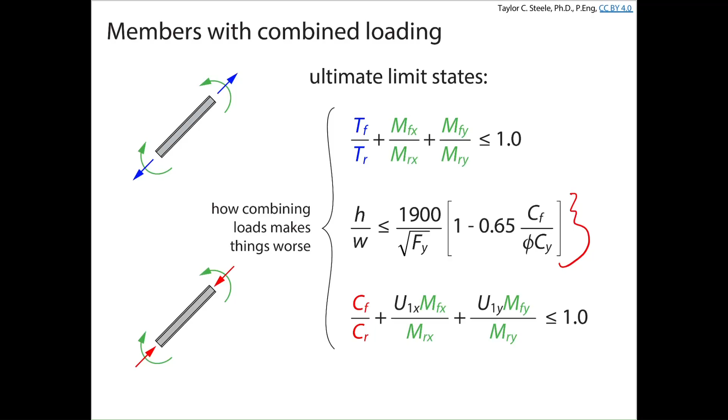Today we're focusing on beam column section class. We already know how to classify beams: Class 1, 2, 3, or 4. That changes a little bit when we've got a compression force, but doesn't change at all when we have a tension force. So for combined tension and bending, you classify the member the same way you would if there was no tension force at all. Beam columns, that's not the case, so we're going to look at how we classify those sections. Once we figure that out, we'll determine whether we check the linear strength interaction we talked about the other day, or the plastic strength interaction, which we're going to talk about today.

A reminder of what we talked about in tension and bending regarding plastic strength interaction: for class 1 and 2 sections, when we can develop the plastic stress distribution, we looked at the interaction between the maximum permissible tension and moment on that section. For strong axis bending, there was a nonlinear interaction that we linearized with the red line and the black line. For weak axis bending, there's a very nonlinear interaction that we linearized with the blue line and the black line.

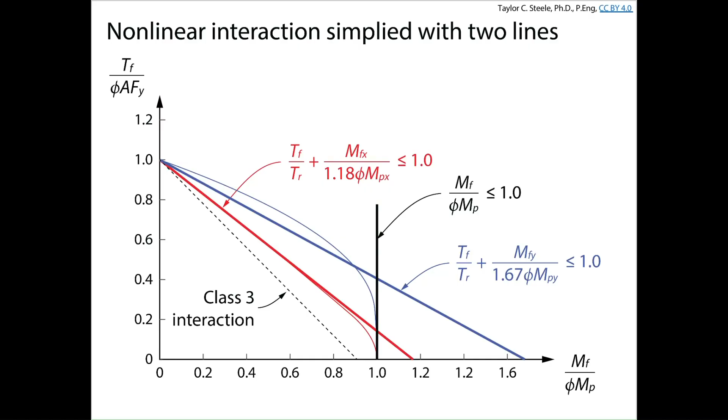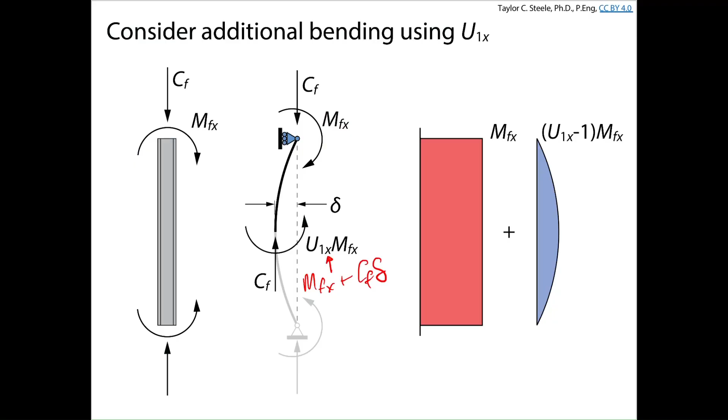The beam column, or plastic strength interaction diagrams, are basically a piecewise linear function where we've got the combined compression and bending as well as the bending-only limit state that we need to check. We also introduced the U1 term and what it's intending to account for in terms of the amplification of bending moment on our beam column, due to displacements caused by the applied bending moment plus an additional moment at midspan equal to the applied bending moment plus the CF delta term—we call that entire midspan moment U1x MFX. Today we're going to look at how to put all these things together in the context of beam columns. After today, you should be able to determine the section class for members with combined compression and bending, or beam columns.

Apply the plastic strength interaction equations to check the strength of a member with combined compression and bending, and describe how to design, roughly speaking, members with combined compression and bending. Spoiler alert: there's no table that really helps us design beam columns.

What you have to do when designing beam columns is just pick something and keep changing it until it works. There's so many things going on here - it's a compression member, it's a bending member, and the section class changes depending on the load. So really you need a program like STAAD.Pro or an Excel spreadsheet to figure out what section is going to be best in this case.

Does anyone have any questions about these three final learning objectives before we get into the content for the morning?

Okay, so we need to unpack section class for beam columns. You've already seen the expression, but I want to talk about what it implies in terms of how the section class changes with the applied loads, and what it's intending to do in terms of treating it as either a pure beam or a pure column, or something in between when we've got combined loading.

When we looked at columns in pure compression, we wanted to make sure we weren't going to get local buckling of the web or local buckling of the flange before we reached the yield stress. If we achieved that, we didn't have to reduce the area, and we could use phi Fy divided by all the junk in the denominator to calculate the compressive resistance. In order for us to not have to reduce the area, the width to thickness ratio, where B was half the flange width, divided by T, the flange thickness, had to be less than or equal to 200 divided by the square root of Fy.

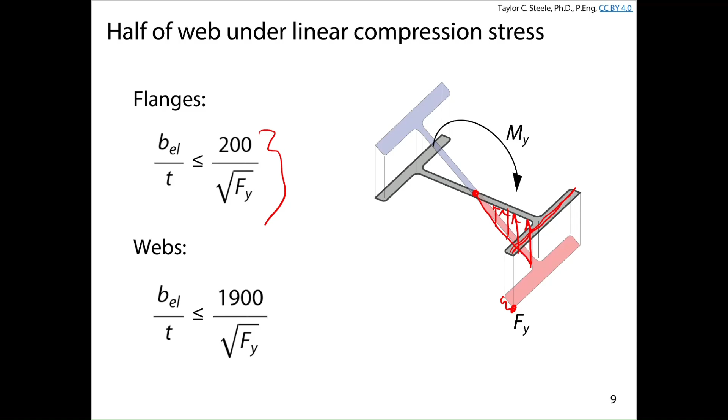Okay, so that's stuff we've already talked about. When we're dealing with beam columns and adding a compression force, as long as we're in the linear elastic range, we can assume we can add these stresses together - the resultant stress from compression and bending. As we add compression, the neutral axis shifts from the center of the section down towards the flange that's in tension. So as we add compression, more of the web experiences more compression, and we're reducing the limit based on the applied compression force.

Basically, if CF is 0, this whole expression just turns into 0, and we get 1, leaving us with the expression we had for pure beams before. But as CF approaches the yield resistance, phi Cy, which is basically equal to phi A Fy, that means we apply less and less bending moment before we reach the strength, approaching the case of pure compression. As we approach pure compression acting on the section, this becomes 1 instead, and this whole term becomes 0.35. 1900 times 0.35 equals 665, which is very close to 670.

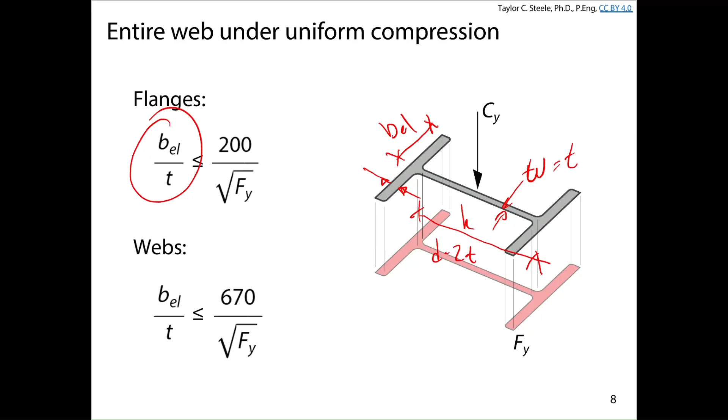Okay, so what we're doing when we're trying to determine the section class for beam columns is we're somewhere between pure compression and pure bending, and the intent of the expression here to determine whether or not, for example, we have a class 3 beam column is basically linear interpolation between pure column and pure bending. Okay, so that's what we're trying to accomplish here.

What that means is section class can change with load, which is kind of annoying, right? You might have one combination of CF and MF where you have a class 2 beam column. For a different load combination, you might have CF and MF where you have a class 3 beam column. And so you have to check the interaction equation differently depending on the section class that you get from those calculations.

Are there any questions about that concept of interpolation between pure bending and pure compression, or why we may result in having a different section class with the different compression forces that we could apply? Are there any questions about those concepts before we continue?

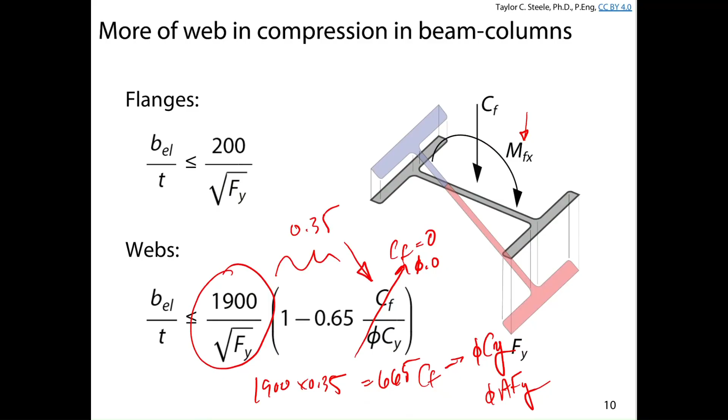Okay, so that's for class 3 sections. We've got a bunch of other things to check. So the flange does not change. We use the same width to thickness ratio limits that we did for pure flexure: 200 for class 3, 170 for class 2, 145 for class 1.

But now, when we're dealing with elements supported along two edges, like webs of I-sections, that are subjected to combined axial compression and bending, then we're dealing with 1100 times some stuff, 1 minus some stuff times CF over phi CY, 1700 with a 0.61, and 1900 with a 0.65.

And basically, the same trend happens as we try to improve the section class from 3 to 2 to 1. The limit on the width to thickness ratio is going to get smaller and smaller, meaning we need to have thicker and thicker components. In this class, we're focusing on strong axis bending and compression.

You could have weak axis bending and compression as well, in which case there's a separate set of things that you need to check. We're not going to get into weak axis bending and compression in this class, but you'll notice that for class 3 sections, it's very similar. For class 2 sections, it's completely different. And for class 1 sections, it's completely different.

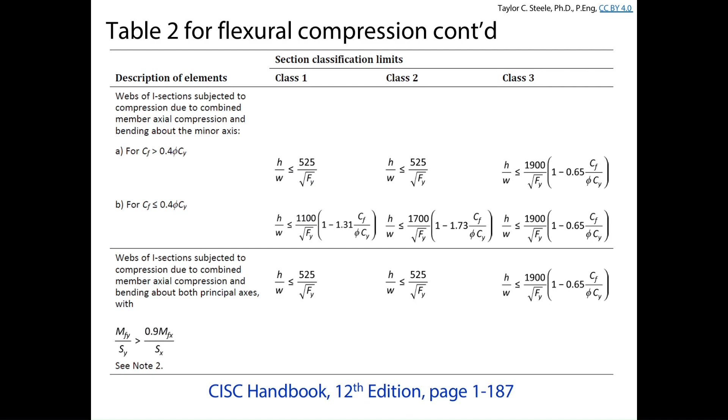Okay, so it depends on what CF is in terms of the yield compression force that you can develop in the column, and that's as much detail as we're going to get into on that.

So I'm going to focus on this for a minute because this is what we're going to be focusing on in this class. So beam columns, why is that doing that? That's annoying. There we go. I'm just going to delete that to stop it. Okay, I'm not going to delete that anymore.

So we're dealing with these 3 potential limits for class 1, 2, and 3. And if we already know what steel we're working with, we've got square root of Fy down here. And if we know what section we're trying to classify, we also know what Cy could be. Cy is just the yield compression force.

I don't know why they write it this way. They should just write it as AFY. Cy here is AFY. And so if we know what section we're dealing with, we know what the area is.

So the only thing that changes or has the potential to change for a given cross-section basically is the factored compression force. So H over W is constant for a section. Everything else is constant except for CF.

There's a very neat table in the handbook, table 4.7, that helps us. It's the only table that's helpful for beam columns in the handbook. It tells us how we can quickly classify different webs of different sections based on the CF to CY ratio.

Okay, so a bigger CF to CY ratio means that the limit gets smaller. Basically, if we have a CF to phi CY ratio for, let's say, W690 by 192, the higher the compression force is, the higher the CF to CY ratio, and the worse the section class is going to be.

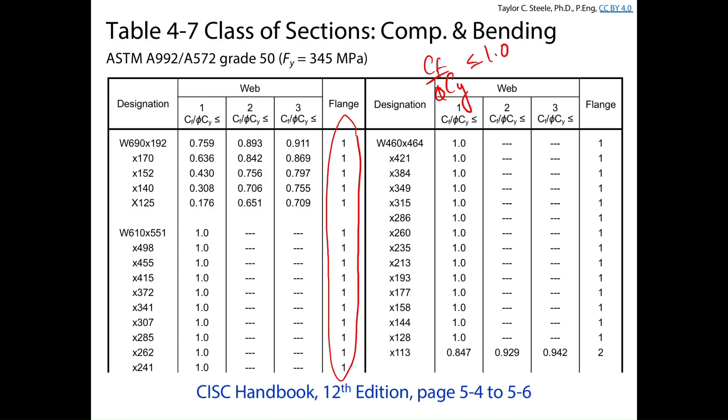Okay. So let's say we got a class 3 section. Well, you go and do the stuff that we talked about on Wednesday. If you get a class 1 or 2 section, you go ahead and do the stuff that we're going to talk about now. And so clause 13.8.2 of CSA S16 tells us how to check the strength of class 1 and 2 sections, specifically of I-shaped members. Okay, in this class we're just going to be dealing with wide flange sections as beam columns. It's a little bit different for HSS, and I think those, well, it has to be doubly symmetric to be considered class 1 and sometimes class 2 anyway. So we're going to focus on wide flange shapes, and therefore we're going to look at 13.8.2 for that reason.

When we think about the nonlinear interaction, well, it doesn't change. All of a sudden, we're just flipping tension to compression. And so in terms of cross-sectional stresses, we're just doing the same thing. We're trying to prevent the yielding of the cross-section, and we're trying to check overall member strength. So in terms of the nonlinear interaction effects that we talked about for combined tension and bending, it's the same for combined compression and bending. Okay, the only difference is now we sort of have this amplification factor from the P-delta effects that we didn't have there from the applied tension and bending.

Basically what this means is that when we start to check the cross-sectional strength interaction, we have basically the same thing that we had before for tension, except now we've got the U1x and U1y parameters in there. So the only thing that really changes is for combined tension and bending, this was always 1.0, at least for cross-sectional strength checks, but it's going to change as we go through different limit states. So for cross-sectional strength, just like tension, it's going to be 1.0, and that's an easy calculation. For other things, it might be slightly different. I'll talk about that in a minute.

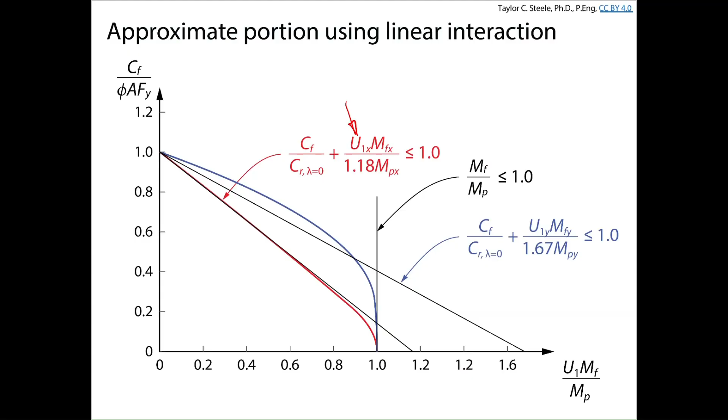Does anyone have any questions about how this is different and similar to class 1 or 2 sections under combined tension and bending, and how it's similar and different from the interactions of class 3 beam columns? Are there any questions about these concepts before we continue?

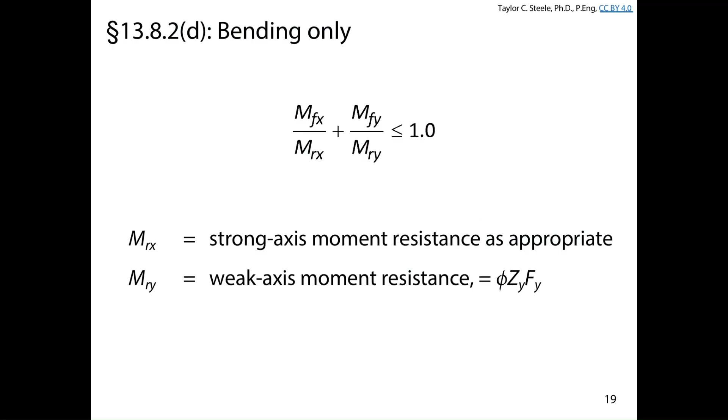Okay, so that's great. We've got lots of time for an example, which is what I was hoping for. We're going to go back to the same example that we started looking at the other day.

Just for context again, this column is a wall column. The wall is going in and out of the page here. This is just a roof beam at the top that's supporting the beam column, and wind is blowing on the face of the building this way, and the result is that from the cladding on the members between columns, we get point loads of 30 kilonewtons acting on the beam column. The other effect is that we're going to assume, I don't know if it's reasonable or not, but for the purposes of this example, we're going to assume that the members carrying the cladding will also provide lateral support to the beam column at those 3 intermittent points. So we'll assume it's adequately braced laterally, and also torsionally, at those 3 points.

Okay, so we've got an 8-meter tall column. It's the same section as the other day, same grade as the other day, loaded with the same forces as the other day. What we're going to do is determine the section class of the beam column and check the appropriate interaction equations for one of the load combinations that we checked the other day.

So we calculated the effects from 1.25 dead plus 1.4 W plus 0.5 snow. There's also 1.25 dead plus 1.5 S plus 0.4 W. We need to check both, but we're not going to have time to do both today. I'll continue the checks in the example notes posted to D2L.

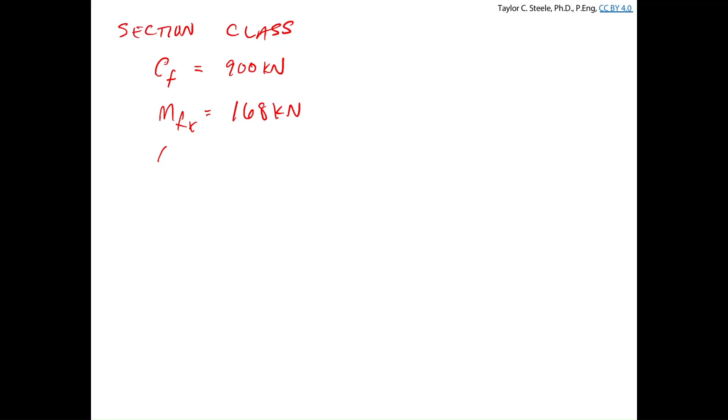So for this load combination of 1.25 dead plus 1.4 W plus 0.5 snow from the example the other day, CF is equal to 900 kilonewtons, MFX was equal to 168 kilonewtons, and U1x for this load combination was equal to 1.20.

There's no weak axis bending present on this column because there's no loading applying any kind of weak axis bending. We've got an axial force and loads bending the column about the strong axis. So MFY is 0 in this case, and we're not going to consider weak axis bending effects because there's none to consider.

Okay, does anyone have a handbook with them? Katie's got it here. Thank you, closest one. I was very determined to remember to bring it today, and of course I didn't. But what we're going to do is go to the tables here.

So what we need to check, if we recall, is we're checking the flange to see if it's class 1, 2, or 3, and we're going to check the web to see if it's class 1, 2, or 3. But now the web check depends on the applied axial force relative to the yield load for that particular member.

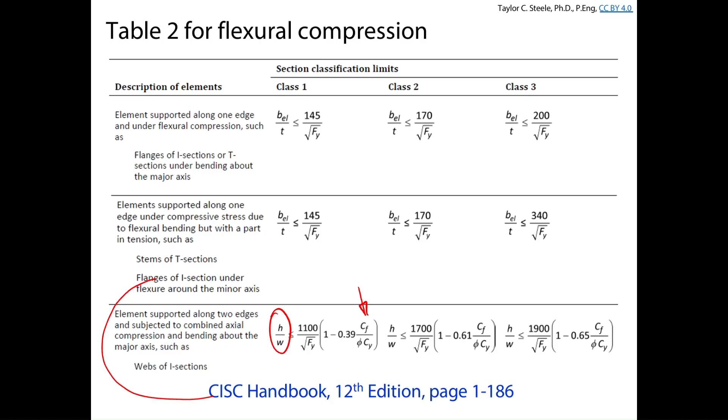Does anyone have any ideas where you could very quickly find some information in the handbook about any of these quantities? We need to calculate phi cy. What's the fastest way to get phi cy using the handbook? We could go find the area of a W310 by 64 and multiply that by Fy, and then multiply that by phi. Does anyone know of anything faster?

So I guess I'm saying 360. What do I have written there for the example? It should be 360, I think. 360 by 64, sorry.

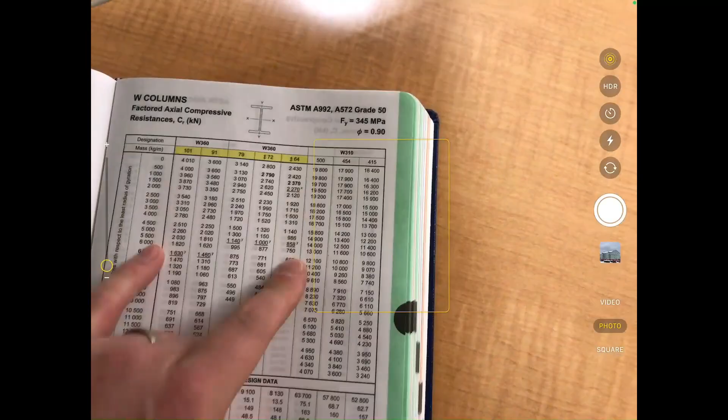So if you go to the handbook and you go to the column selection tables, this is something you should remember if you were ever dealing with a beam column on an exam and trying to do things quickly and I didn't tell you otherwise. In addition to the compressive resistance for all of the unbraced lengths, one of the values it gives you is the compressive resistance for a length of 0.

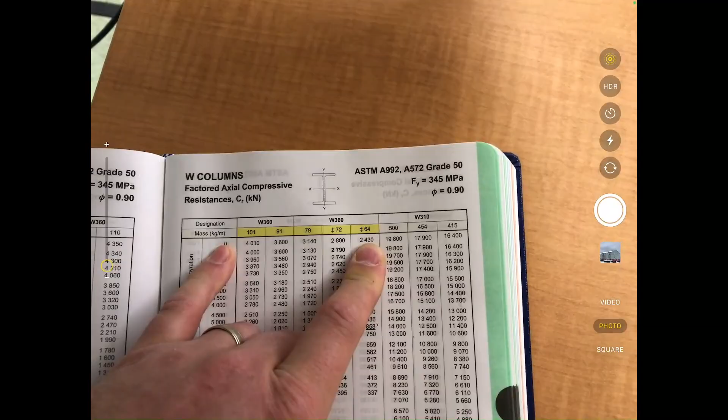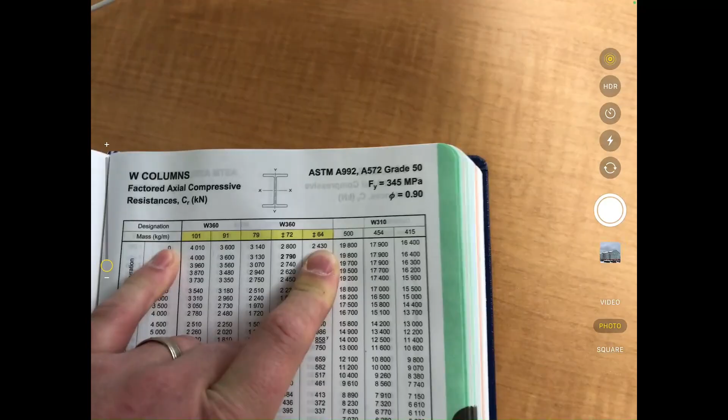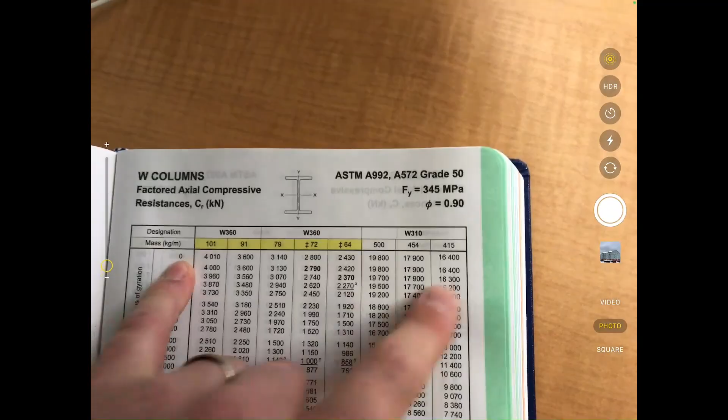Is that useful to us today? What does the compressive resistance for an effective length of 0 represent? It's the yield load, right? Phi A Fy, because when KL is 0, then lambda is going to be 0. We can't buckle a column with an effective length of 0. And so that means if we want phi Cy, we can just come to the column selection tables and find the resistance for KL0.

Okay, so phi Cy, when I'm calculating that, is 2,430 kilonewtons. That comes from the column selection tables. Just for reference, that's on page 4-21. So the quickest way to find phi Cy is to look it up in the handbook.

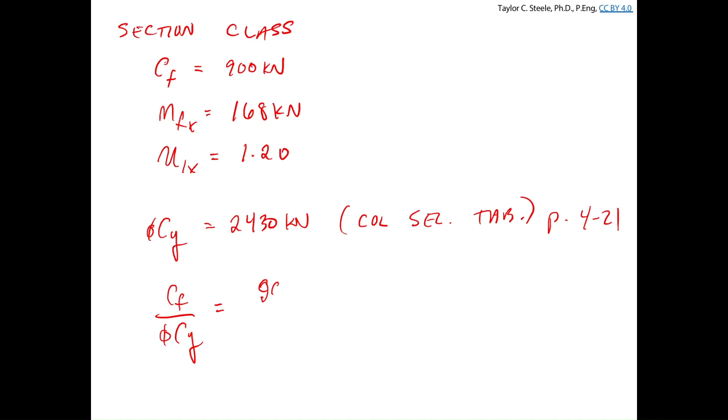So to use the tables for section class, we need CF over phi Cy. That's equal to 900 in this load case, divided by 2,430 kilonewtons. Do I have that ratio here? I'm sure I do. That's equal to 0.37.

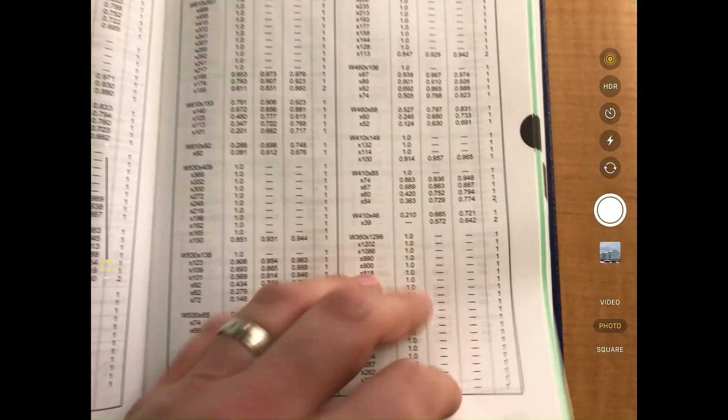So all I need to do is go to table 4-7 in the handbook, and I'll show you where that is. So in the handbook, we're at table 4-7. It starts on page 4-100, only on these 2 pages. And what we need to do is find our section. So we need to find our W360 by 64.

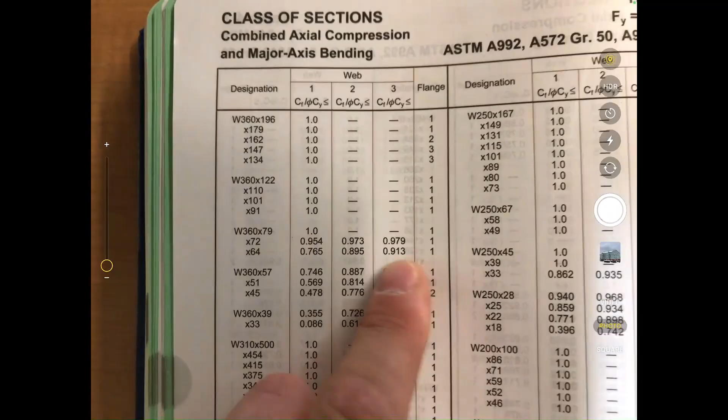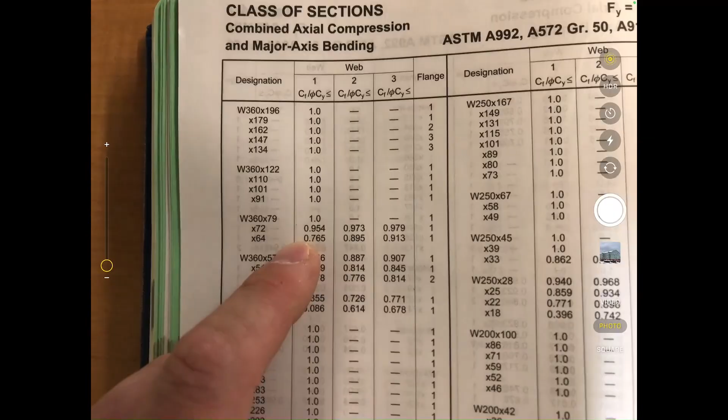The table tells us the flange is class 1, and it tells us the ratio of CF to phi Cy has to be less than 0.913 to be class 3, 0.895 to be class 2, 0.765 to be class 1. We have a ratio of 0.37. What does that mean about our web? It's class 1. Excellent. So table 4-7 tells us the web is class 1. It also says the flange is class 1, from table 4-7. That means our section is class 1.

So section classification: go to table 4-7. It'll tell you directly what the flange class is - that never changes with load. We find phi cy in the handbook, divide CF by phi cy, get the ratio, use that ratio to classify the web. Done. So if you're ever dealing with a beam column, unless I say do it by calculation and checking in accordance with table 2 of S16, if I just say classify the section, you should probably do it the fast and easy way. Are there any questions about what we just did there to classify the section?

So what does that mean? Well, we're talking about plastic strength interaction today. We've got a class 1 I-shaped member, so we're going to clause 13.8.2 to calculate the resistance, or the interaction ratio, for our beam column. We've got to check a bunch of stuff.

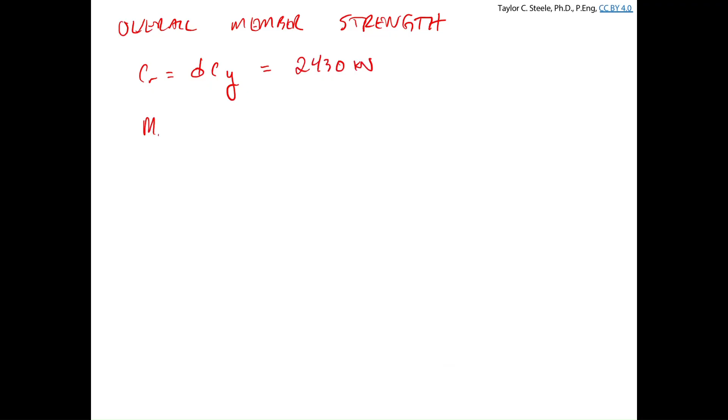MRX is equal to phi ZX Fy. We can look up Z, multiply by 0.9 and Fy, or is there a tool in the handbook we can use to get MRX quicker than that?

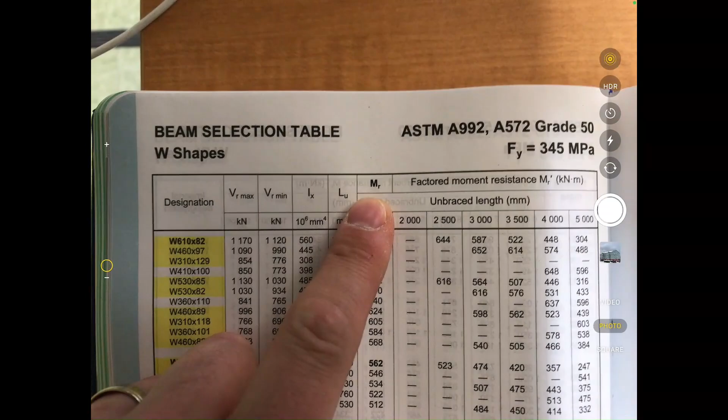There are the beam selection tables. You know it's a class 1 section, we're looking at the full moment resistance, it's the fully braced moment resistance. So what we want to do is look at the column with MR in bold. We want to be looking here - the fully braced moment resistance. And we want to come down and find the section we're dealing with.

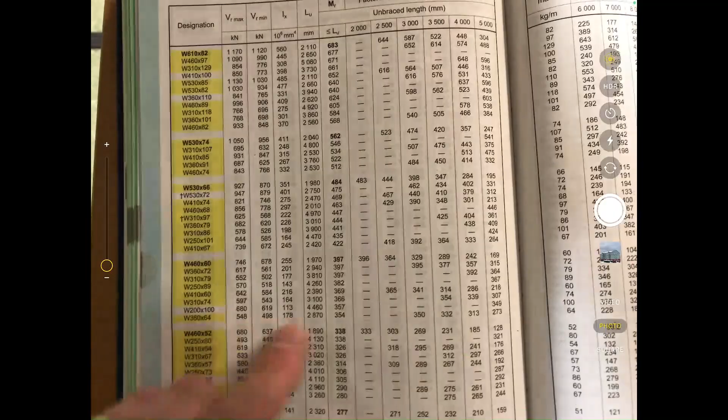So we're looking for 360 by 64. There it is, and if we look at moment resistance, there it is - 354, that's the fully braced moment resistance. That's MR calculated in accordance with clause 13.5, and that's what we're going to be using in our interaction calculations.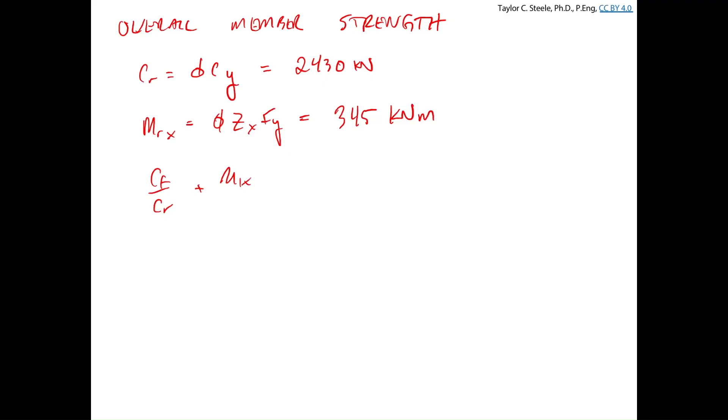CF over CR plus 0.85 U1X MFX over MRX has to be less than or equal to 1. We have CF, which is 900 kilonewtons, over CR, which is 2,430 kilonewtons, plus 0.85 times 1.20 times 168 kilonewton meters divided by 345 kilonewton meters. If we do that calculation, we should get an interaction ratio of 0.854, which is indeed less than 1.

So, overall member strength - we're just dealing with preventing excessive yielding of the cross-section. For that reason we use phi Cy from the handbook, and phi Z Fy, which is phi Mp, also from the handbook - 345. We calculated U1X the other day. Mash everything together, we get a ratio of 0.854.

Is that acceptable for our beam column? Is our beam column strong enough to prevent failure by overall member strength? Yeah, it's less than 1, so we're good.

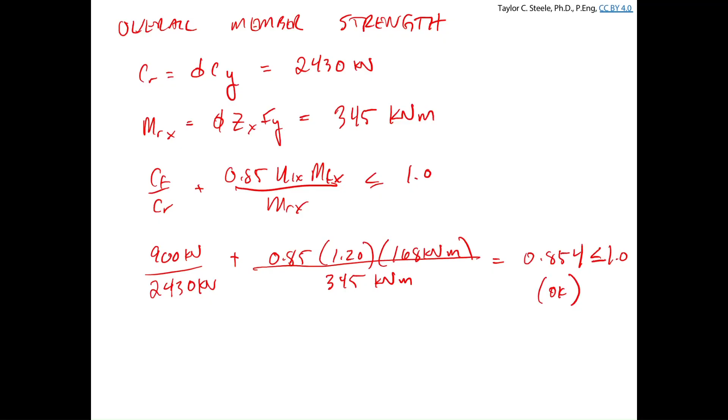Are there any questions about the calculation of the interaction ratio for overall member strength before we continue? Sorry, cross-sectional strength - yeah, again, I hate the term overall member strength. Cross-sectional strength is what we just checked. Thanks, Katie.

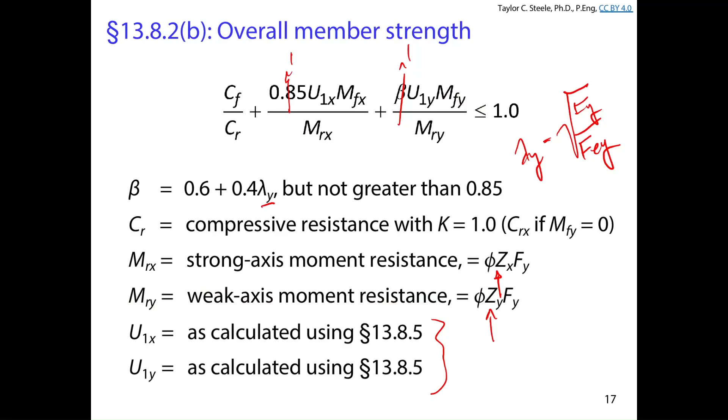So next, we need to look at overall member strength. And we were kind of annoyed that beta is going to change, but we don't care what beta is because we have no weak axis bending anyway. MRX is the same, U1X is the same. CR is calculated a little bit differently. CR now is based on, for us, because we only have strong axis bending, the strong axis flexural buckling resistance. So we need to calculate CR based on the overall member strength.

We need to calculate CR based on strong axis flexural buckling. Did I write cross-sectional strength for that one? Okay, so for overall member strength, CR is CRX. That means we need to calculate FEX - pi squared E over (K X LX over RX) squared.

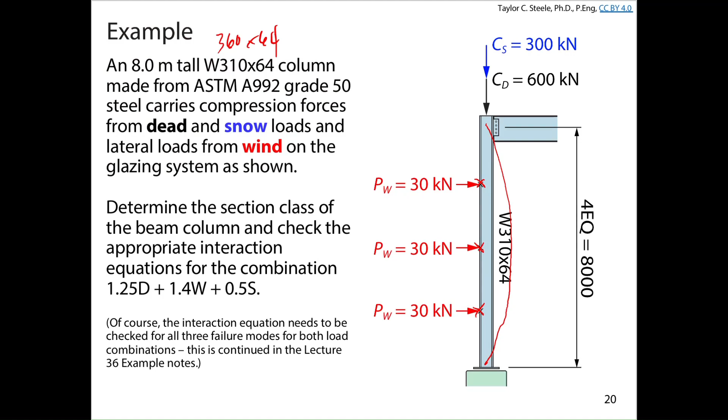So we need RX for this particular section, and we also need to observe our boundary conditions. We're already bending this column about the strong axis. There's nothing bracing it from top to bottom against strong axis deflection or flexural buckling. The column is already bending this way, which means under excessive compressive load it's going to buckle out like this. We'll take K as 1 because it's connected to a beam with a simple connection at the top and a foundation at the bottom. We could use 0.96 like we talked about in lecture 25, but we're just going to keep it simple and use K as 1. Our overall length of that column in flexural buckling is 8,000. So the only other thing we need to do is look up RX.

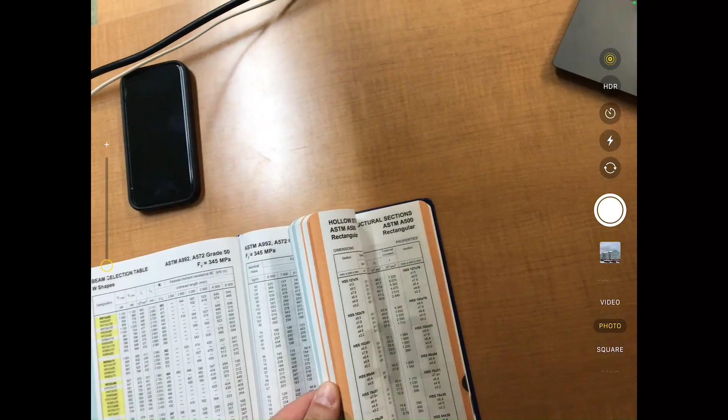I'll turn the camera on just in case no one's looked up Rx for a section before. We can look in a couple different places—we could look at the sectional properties, or the compressive resistance tables. Let's just go back to the compressive resistance tables since we already looked at those before.

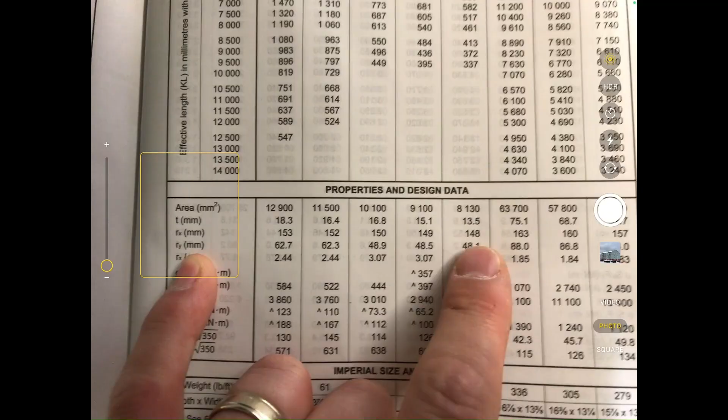We're looking at our W360 by 64. If we come down to the bottom, it tells us Rx and Ry. For our calculations, Rx is going to be 148. We could also try to use the Rx over Ry ratio to get a compressive resistance, but it's not going to be exact, so we might as well just go through the calculation instead.

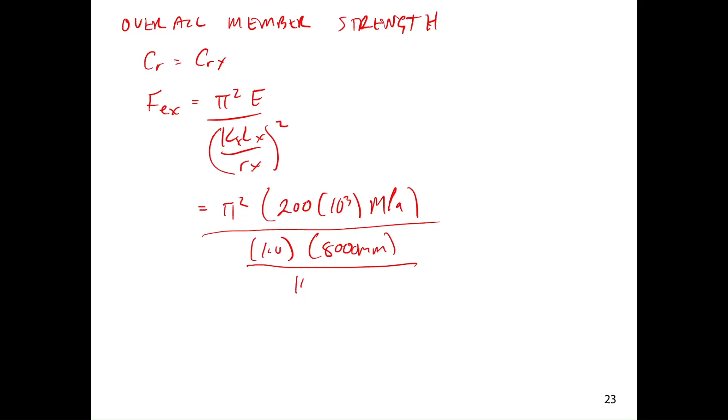That gives us pi squared times 200 times 10 to the 3 MPa, divided by 1.0 times 8,000 millimeters over 148 millimeters, squared, and we get an FEX value of 676 MPa.

Because we have strong axis bending for overall member strength CR, CRX, that means we need to calculate FEX. We're using K as 1, L is 8,000, and we use R for the cross section about the strong axis. Any questions about that calculation before we continue?

So lambda, we might call it lambda x, is equal to the square root of Fy over Fex—square root of 345 MPa, remember ASTM A992 grade 50, all W sections all the time, divided by 676 MPa. We get a lambda value of 0.715.

Now we can calculate CRX. CRX is phi A Fy divided by 1 plus lambda to the 2n, all to the 1 over n. We're not using a reduced area because our section class is 1. We'd only use a reduced area if we had a class 4 section, or if the web exceeded 670 over the square root of Fy for that particular case. We're dealing with a class 1 section, so we'll calculate phi A Fy based on a non-reduced section resistance.

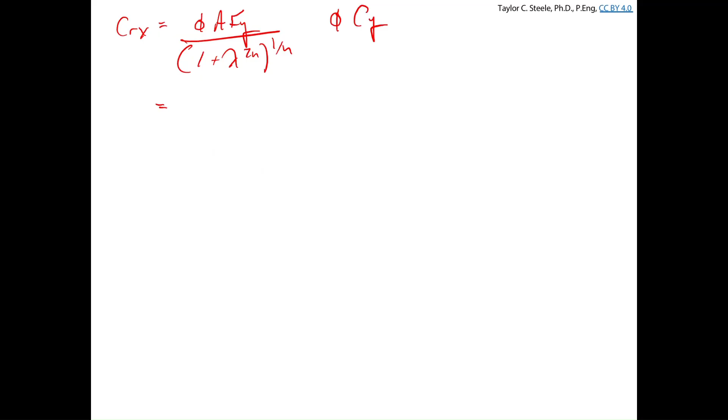Phi A Fy is also Cy, so I can make my life easier here—instead of finding the area, I'll just write this as phi Cy, which is 2,430 kilonewtons. We already looked that up in the handbook. Divided by 1 plus lambda, which is 0.715, to the 2n, all to the 1 over n.

What value of n do we use for hot rolled sections? Options are 1.34, 2.24, 1.24, 1.34, 2.24. 1.34 it is, and that's the right answer.

Divided by 1.34, we end up with a compressive resistance about the strong axis of 1,957 kilonewtons. So calculate CR based on phi A Fy.

Shorthand, we already found phi Cy, which is the same—Cy is just A Fy, so we just plug that straight in for phi A Fy. Divide through by the junk in the denominator, get a compressive resistance of 1957. Any questions about that calculation before we continue on?

Now we have everything we need. We've got MRX, which doesn't change, and CR calculated in accordance with the standard. So we've got CF over CR plus 0.85 U1x MFX over MRX. That's equal to 900 kilonewtons divided by 1957 kilonewtons, plus 0.85 times 1.20 times 168 kilonewton meters divided by 345 kilonewton meters. The ratio calculated this way is 0.944.

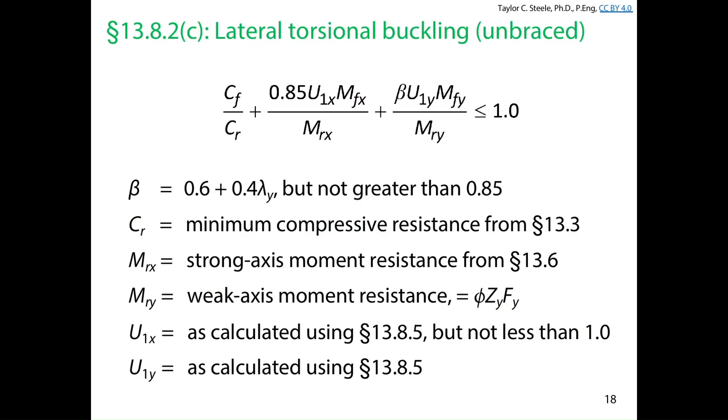Let's look at our problem. Now we're looking at buckling about the weak axis, which is in and out of the page, so I can't really sketch that here. But basically, it's going to buckle between the points of lateral restraint. We'll assume that at these girts, or the members that carry the wind load, we've got adequate restraint to force weak axis buckling with a reduced effective length.

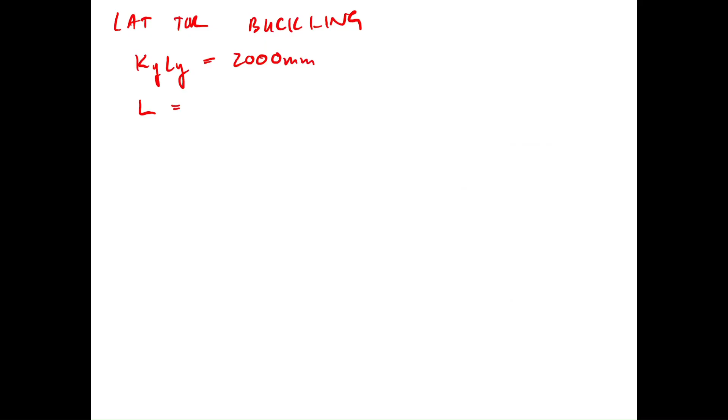So for lateral torsional buckling, we're going to take KYLY as 2,000 millimeters. And for the lateral torsional buckling calculations, we're also going to take L equal to 2,000 millimeters. The girts are going to brace the compression flange against lateral torsional buckling, unbraced in between those points, and same for weak axis flexural buckling.

I guess I was zoomed in there. I don't think I can make those any bigger, so I'll just rewrite that quickly: LTB, KYLY—KYLY is 2,000, and L is 2,000.

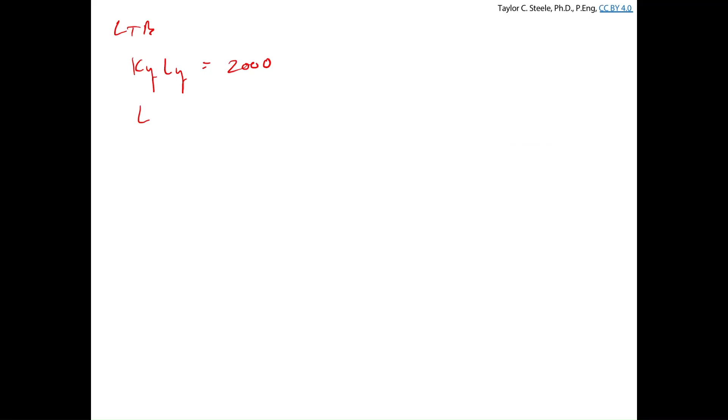So we need to calculate CR as the minimum of CRX, CRY, CRZ. CRZ is going to be higher than CRY because we're going to assume that KZLZ is equal to KYLY. Torsional buckling is never weaker than weak axis buckling for wide flange sections if the effective lengths are the same. So we're going to eliminate CRZ. We already calculated CRX to be 1957.

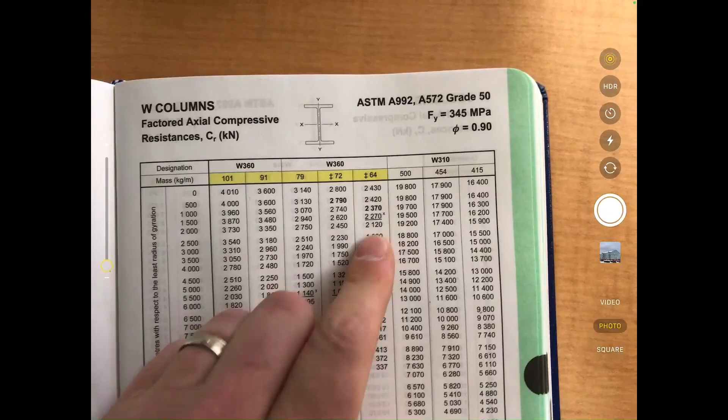Is there a simple way for us to figure out what CRY should be for this value of KL? If you said handbook, you're correct. We already know that these values of CR are based on the weak axis flexural buckling resistance. For our W360 by 64, we'll come here and we will see for an effective length of 2,000, the weak axis compressive resistance is 2,120.

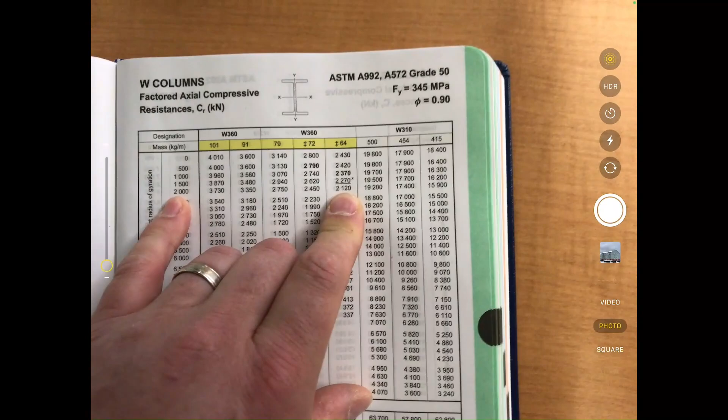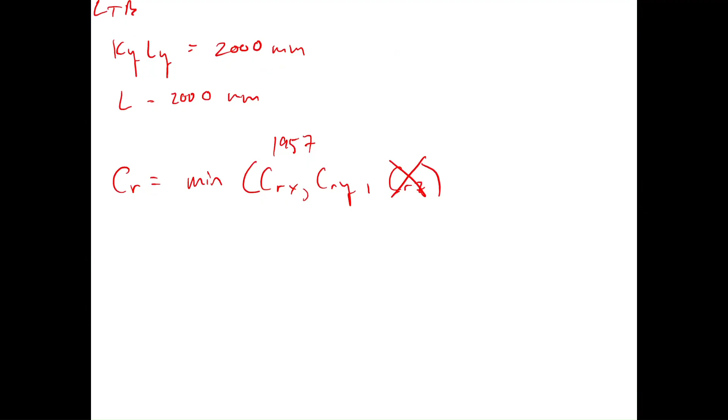Is that higher or lower than the strong axis compressive resistance that we already calculated? That's higher. So we don't take the weak axis buckling mode. We take CRX, which is... oh, what the hell was that?

Whoops. Oh no, I didn't mean to close that. Let's try that again.

MRX. Is there a quick way for us to figure what MRX should be for an unbraced beam? Handbook, right? That's the easiest thing we can do. Now we have to remember the beam selection tables. The values of unbraced moment resistance are calculated for an omega 2 value of 1. Based on our moment diagram, our omega 1 value is not 1, so our omega 2 is not 1. It's probably 1.13. But let's deal with that later.

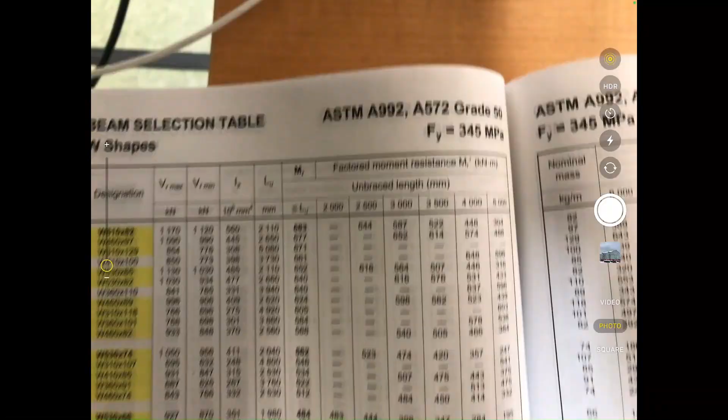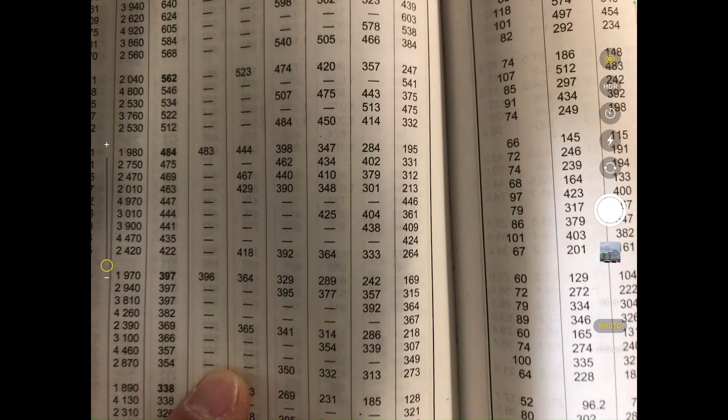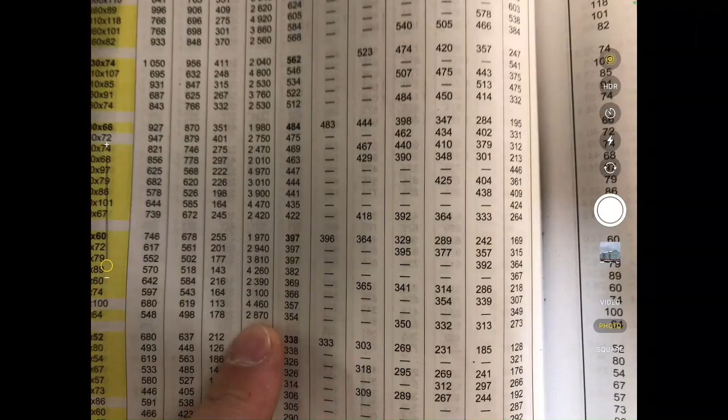So we'll flip through, try and find our section. I missed it. So we're going to look at a W360 by 64. There it is. And we're going to come over to the column for 2,000. Oh, look at that. There is no entry here. What does no entry mean? It means that L value, 2,000, 2,500, they're all... oh, I lost myself here, 64. We've got 2,870, 2,000 is less than that, 2,500 is less than that. They're all less than the unbraced length that starts to cause lateral torsional buckling.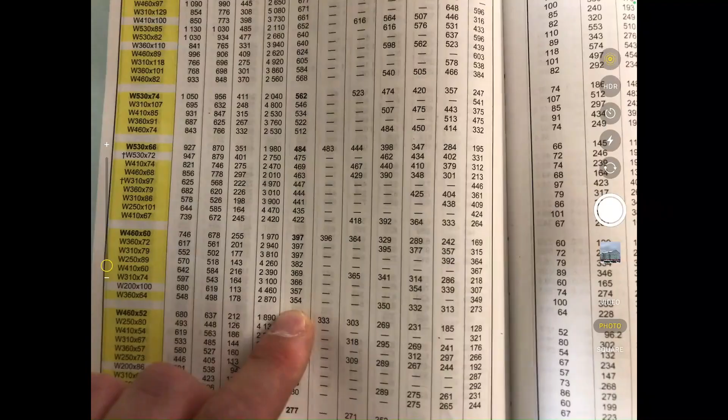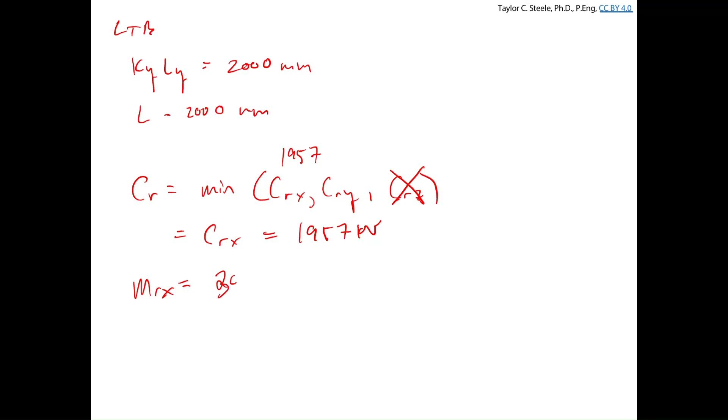That means that even though we have an unbraced length of 2,000 millimeters, we still get the fully braced moment resistance back. Okay, so in this case, MRX is still equal to... oh shit, I keep writing that wrong... 354 kilonewton meters. So what that means is, well, nothing's changed. We had the exact same values for overall member strength, right? We got CRX, and we had the exact same value for moment resistance, MRX.

Despite the fact that we're checking lateral torsional buckling, what this is indicating is our column is sufficiently braced to prevent lateral torsional buckling from governing as a failure mode. If we do this calculation, we're going to get the exact same interaction ratio because all the values are exactly the same. So, we have a problem where we've got a column carrying some wind that causes bending.

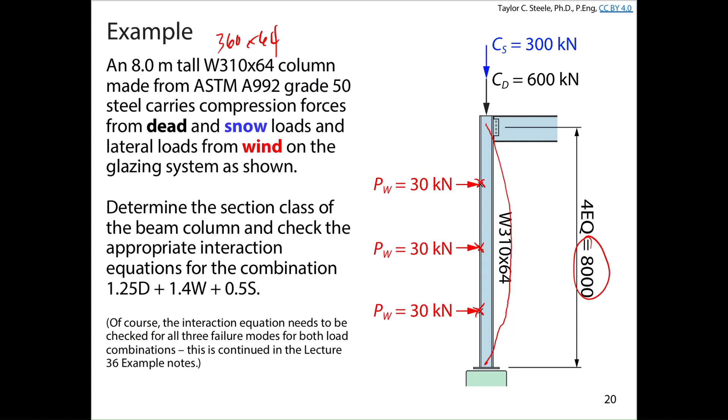Some snow and dead load, some snow and dead load that causes axial force. It's a beam column. We have to classify it. We got class 1 using table 4-7.

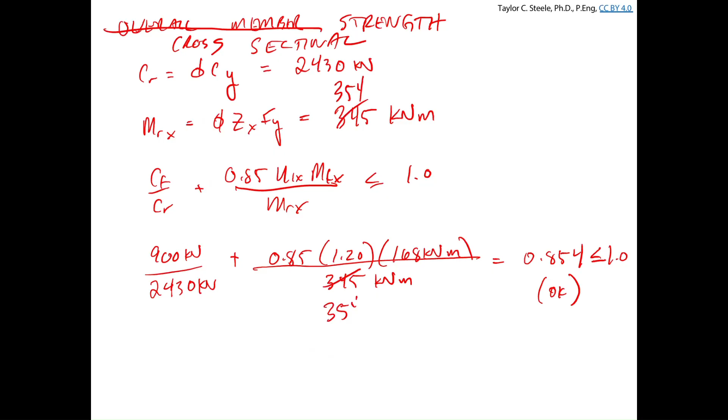We already had U1x because we calculated that for this column last lecture. We checked overall member strength with the appropriate values of CR and MR. They were the full yield load for compression, which comes from the handbook. Fully braced moment resistance. Again, I must be dyslexic. All the ratios are right. This is just 354, not 345. And the moment resistance also comes from the handbook.

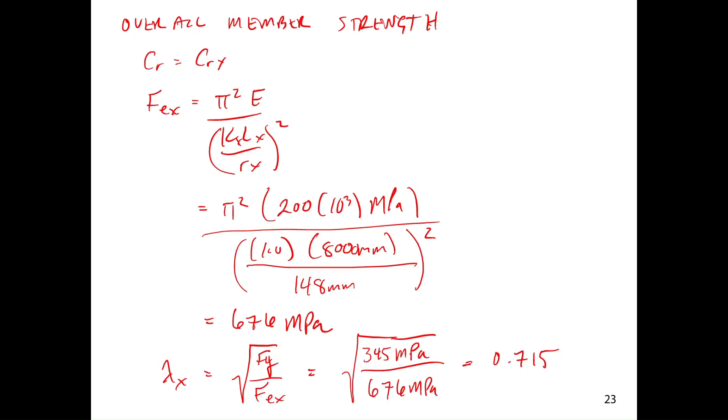The strength is acceptable. For overall member strength, CR changes. It's based on the strong axis flexural buckling resistance. So we have to calculate FEX and lambda x and use that to get the strong axis compression resistance of something a little bit less than phi cy, 1957. MRX is the same. We get a higher interaction ratio.

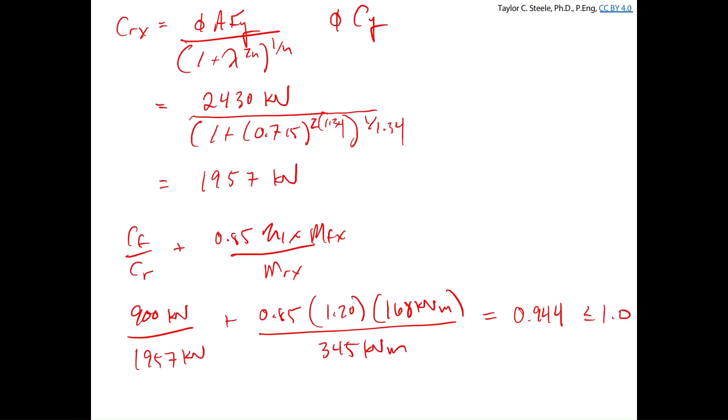For lateral torsional buckling, CRX is the minimum compressive resistance. MRX also happens to be found to be the fully laterally braced moment resistance. That's telling us lateral torsional buckling is not going to be an issue for this particular beam column. The last thing we check is bending only, of course, MFX over MRX. That's equal to whatever it was, 168 over 354, which is clearly less than 1.

Are there any questions about that example or what any of these calculations mean before we wrap up lecture for the day?